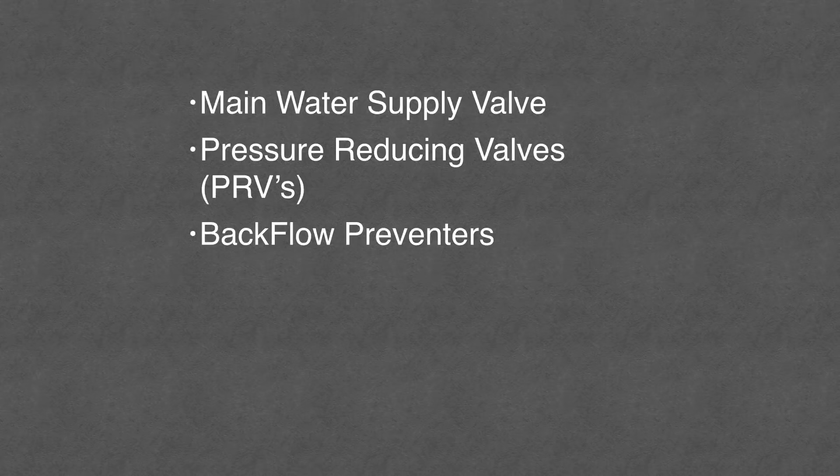Pressure reducing valves, which are required equipment if you have excessive incoming water pressures. We don't have too many of them here on the East Coast, but on the West Coast and other parts of the country, they are a required item. Backflow preventers, another item that is required in certain situations, and we'll cover that. Pipe supports, meaning how your pipe is supported, how it's hung from the ceiling, how it's connected to the wall.

Cleanouts, meaning access to your sewer when it needs to be cleaned out. You'll want to find out sooner than later that those cleanouts come off in a time of need. And finally, sump pumps. For those of you who have the privilege of groundwater coming into your homes, you know what sump pumps are all about, and we'll go over some tips I hope to share with you in the following slides. So sit back, relax, and let's get started.

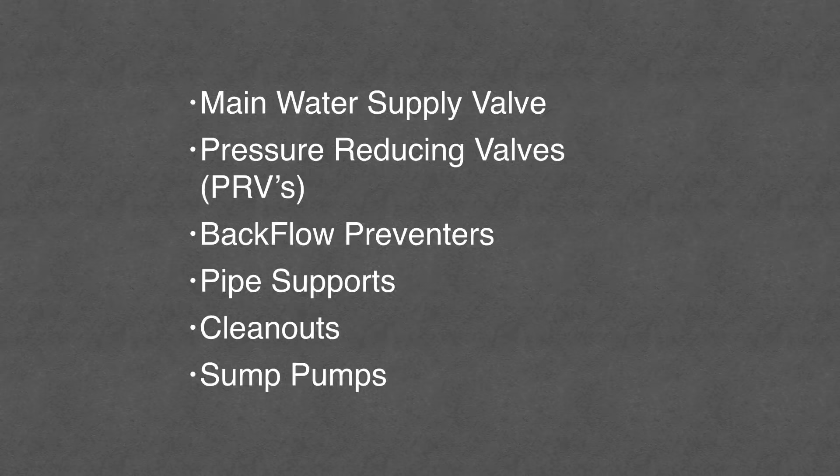The main water supply valve. Do you know where yours is located? It could be in a basement, underground, located in a pit, or even located in a curb box outside of your home. Regardless of where it's located, it should be tagged and documented so everyone in the family knows exactly where it is should an emergency take place.

Where to look? You can look at the front-facing wall of the building, either at ground level or possibly in a basement. You can look below ground, possibly in a pit located with the water meter or the sewer cleanout covers. Look outside of your home for a recessed curb box.

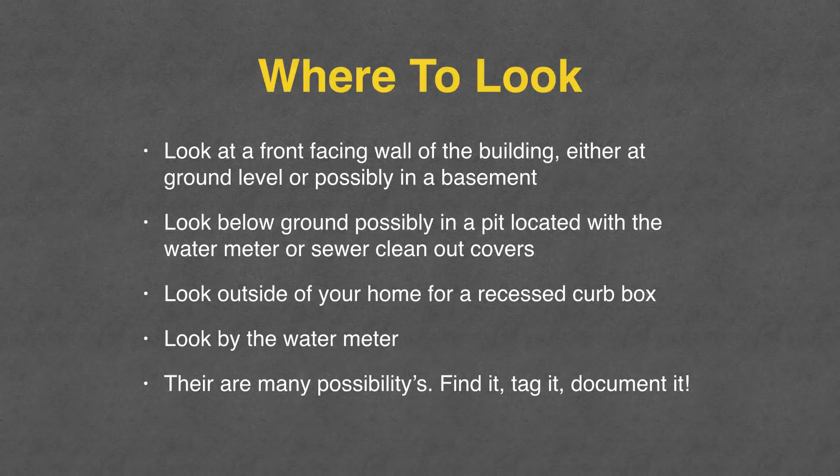I know in parts of the country they are located outside. You can look by a water meter. There are many possibilities here, folks. Find it, tag it, document it so everyone knows where it is.

Why you should care? Because individual point of use valves found under most plumbing fixtures often do not shut 100%. As a matter of fact, folks, 99% of them don't hold. It's just the way it is. They're just under there. They've just been there for years and years and years. Nobody's ever bothered to try them out.

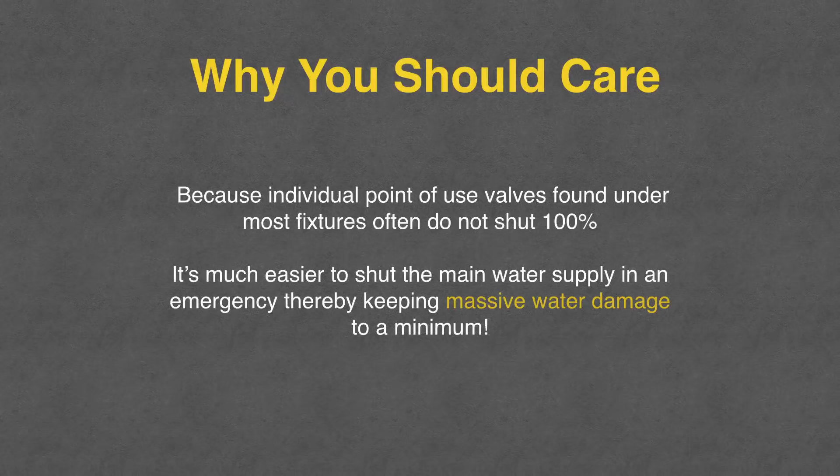And when the day comes that you want them to work, they never work. It's much easier to shut the main water supply in an emergency, thereby keeping massive water damage to a minimum. Let's check it out in our first technical timeout.

All right, folks, this is real plumbing. As you can see, we have a copper water main coming in the front wall of this building. It's about 3 feet above the basement floor here. And as you can see, we have the gate valve, which is the first valve off the line, and that's a round handle gate valve.

And as I said, with round handles, you close to the right, open to the left. Or if you can't remember that, it's righty-tighty, lefty-loosey. And that continues on here into the meter set. And we have our water meter here.

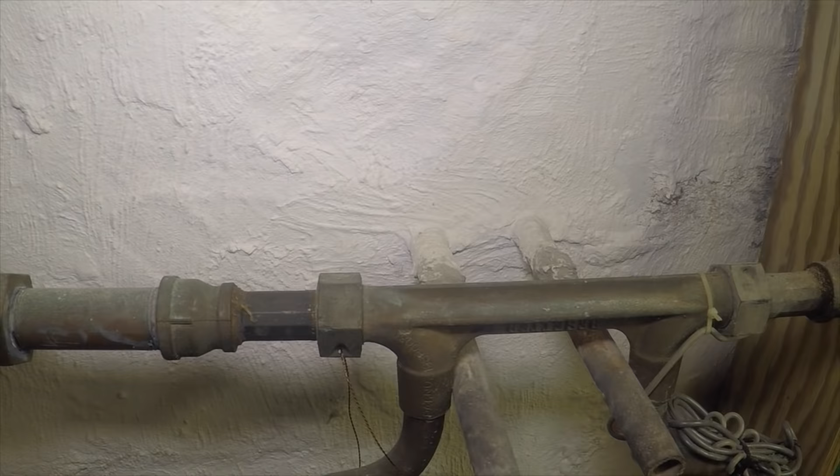And actually at the bottom of the water meter, you're going to see there is a ball valve here. The handle's facing the back. And here's another ball valve here. These are quarter turn to the right or left, depending upon which way this meter set is put in. And in this case, they came out of the meter set.

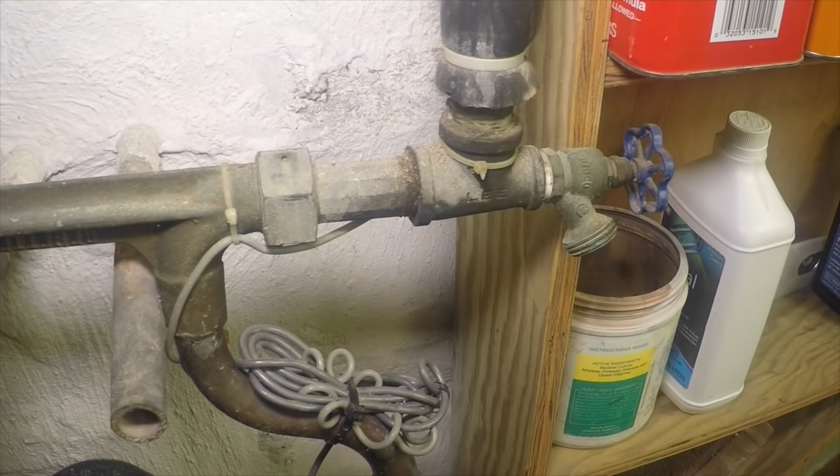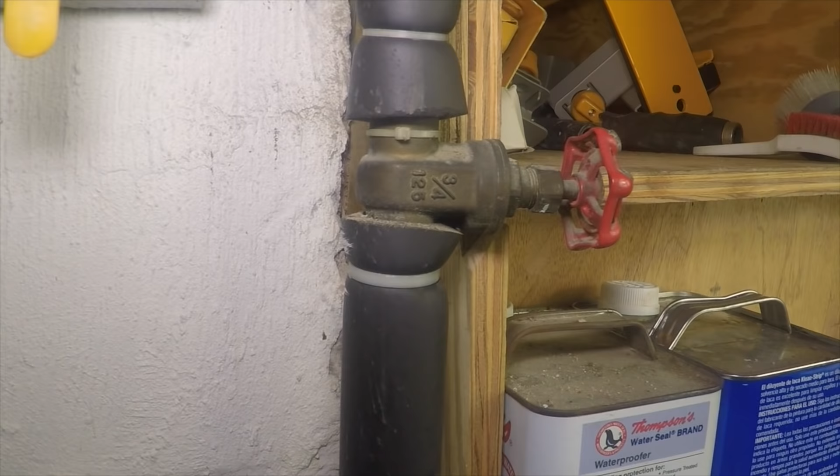The meter set comes up, continues on. You're going to see there's a hose bib. And this continues on up and distributes throughout the house. And in this case here, they actually put another gate valve in here. I don't know why they did that, but they did. It's not a problem. But this is surely an example of a water main coming in.

And as this is the case that we're looking at here, I don't see any tags. But that's because I'm familiar with this building and I'm pretty much the only one here who would ever have access to this room. So I know that's the water meter, but you're going to want to tag your valves. You can tag them, identify them, and that's the main water shutoff.

In a pinch, if there's a problem, if I have water leaking anywhere within this building and I can't be bothered going chasing after individual shutoff valves, this is the go-to valve that I'm going to shut, and then I will assess the situation. So there you go. This is one situation where the water main is coming in. You can see it coming in the wall there.

And it's not always the case. Sometimes it comes in below grade. Sometimes it comes in through the floor and up. But in this case, this is pretty much a typical situation that you would see in a building such as we're looking at.

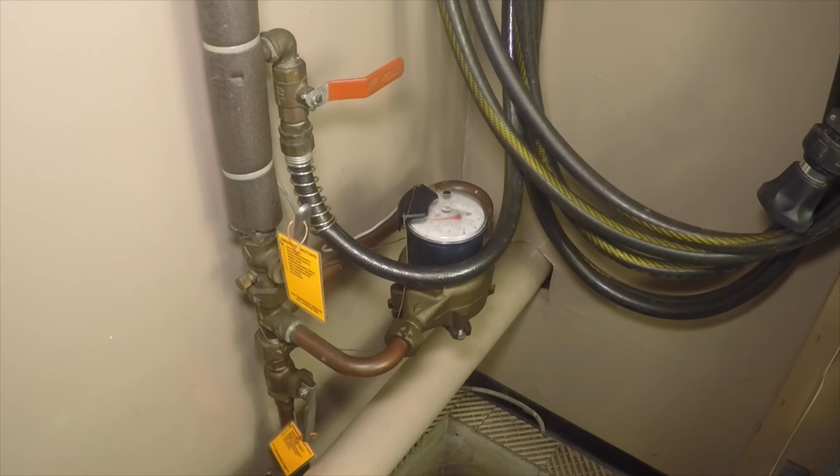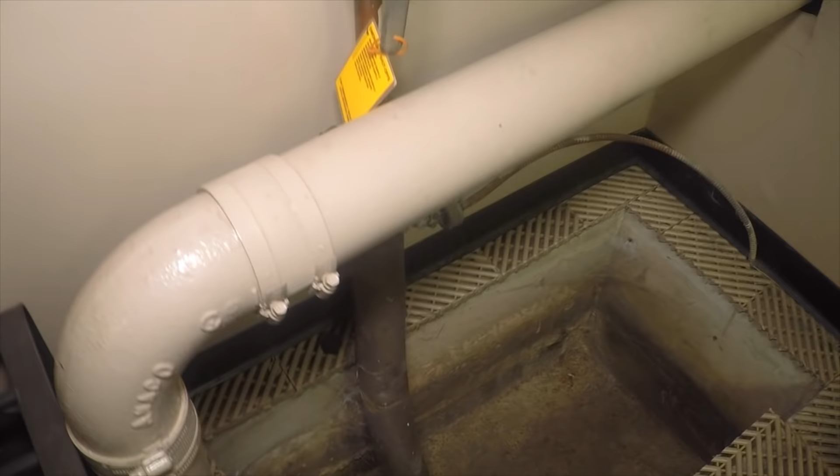Okay, folks, here we are, just another example of a main water supply coming in. And in this case, we're in a garage. And this water main is actually coming up out of the pit. And you see the water meter there. And let me just take a shot down the pit. And as you can see, we go down, comes up out of the pit.

And what do we see in there alongside the water main? You can actually see the two covers, the cleanout covers for this house sewer system. So on the right there, you're going to see the cleanout that goes out toward the street. In this case, this home is equipped with a septic tank. And on the left is the one which would go toward the house, the building house drain.

So just another example of where you might find a water main coming in. Again, this pit is below grade. It's about 12 inches below grade. Comes up out of the pit.

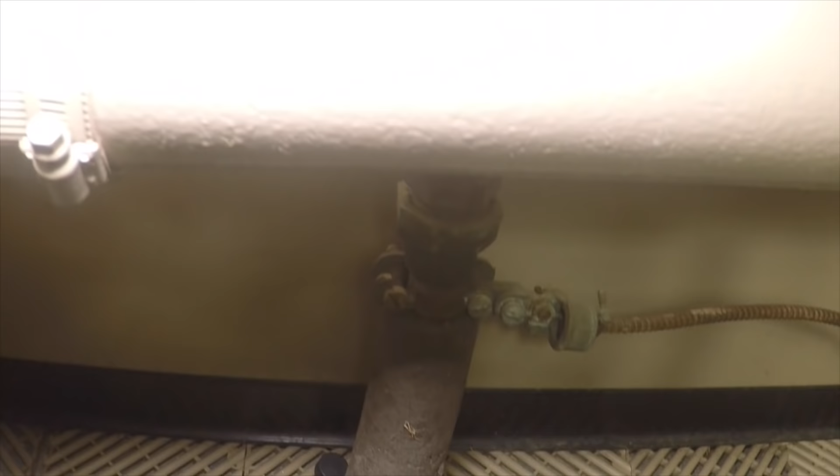And as we come up here, you're going to see this pipe here that we're going to be looking at in a second is the fresh air pipe to the sewer system. And that goes out the front wall there. And actually here you can see it coming up out of the ground just ahead of the house cleanout cap.

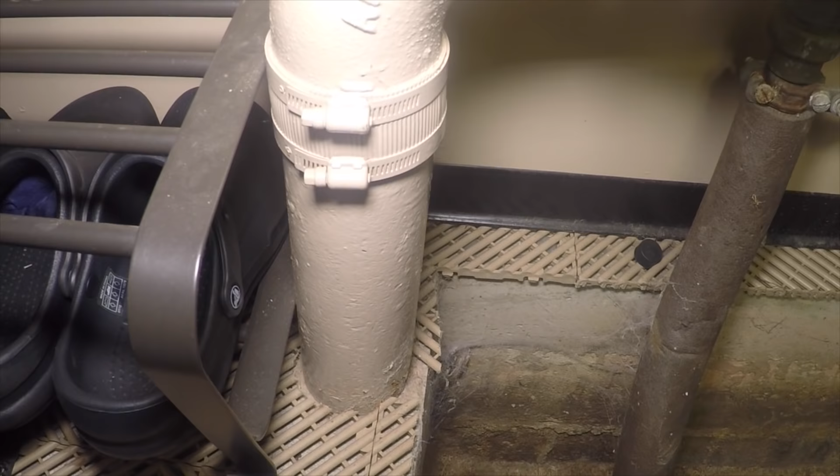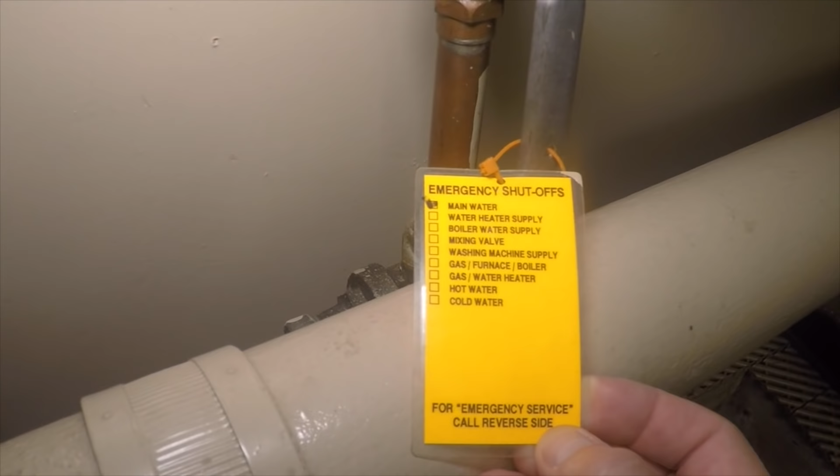And I wanted to bring to your attention here, in this case, these valves are actually tagged. Now this is the meter set. The meter set has these quarter turn ball valves on them. And in this case here, we have some tags noting what these valves are for, which is pretty handy because if there's an emergency happening and the homeowner doesn't know what to do, they can certainly come over here and take a look at these tags.

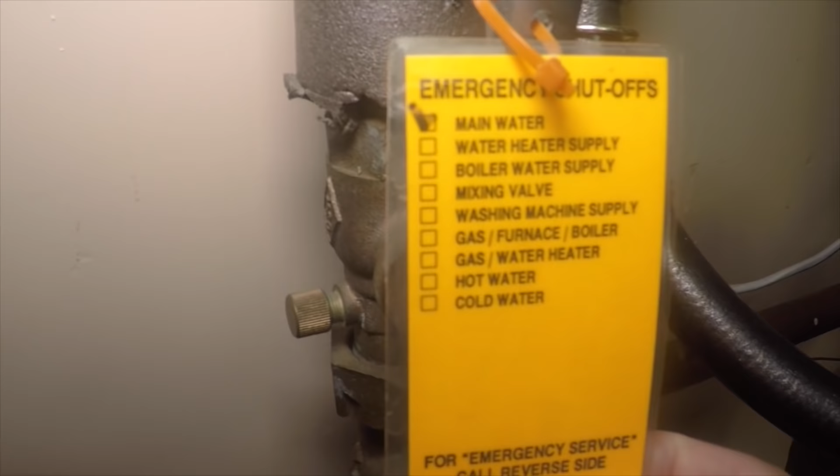So we got a valve on the inlet to the meter set. We also have a valve on the outlet to the meter set, and they are clearly tagged what they are, what their function is.

And let me just scoot in behind here because we couldn't see this behind the fresh air inlet, but the first valve on the main here, and actually they took the handle off, but this is a gate valve. This is the original gate valve that was installed on the water main, and the handle was taken off. I don't know what the reason may have been, but I can certainly tell you it's much easier to do a shut off with these quarter turn ball valves. Either a quarter turn to the right or a quarter turn to the left. And there you have it.

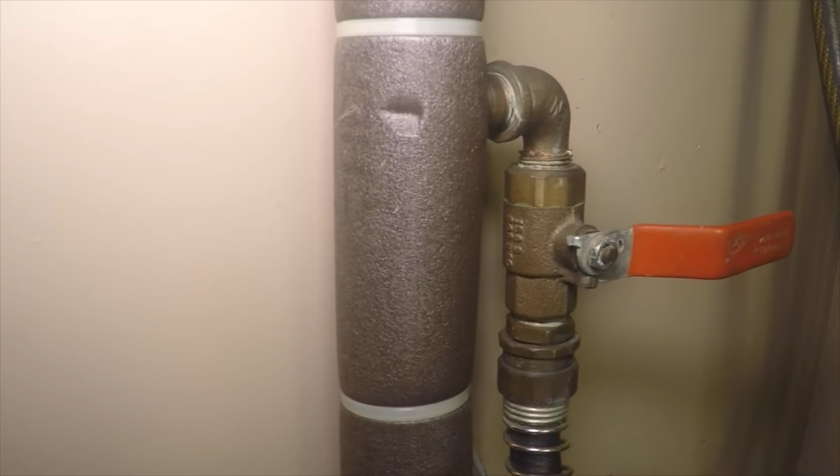As we come up here, there is the outlet to the meter set with another quarter turn ball valve. And actually, we have a ball valve that's servicing the garden hose. So this is just another example of where you guys might be looking or trying to locate your water main. They're in all areas. They're in basements. They're at ground level. They're below grade. They're outside. So just some more food for thought in case you're trying to figure out where your water main is. And a nice touch would be to have your valves tagged.

I highly recommend it because when that emergency happens, you want to know exactly what to shut. By knowing exactly where to shut your main water supply off in a time of need will save you from the expense, heartache, and inconvenience of massive water damage.

Let's review. We looked at the possible locations of the main water shutoff valve. If it's a round-handled gate-style valve, I suggest that you turn it off to the right. Everything always turns off to the right. And if you have a problem remembering that, I would suggest you remember this: righty-tighty, lefty-loosey. Always go clockwise for a round-handled valve. Now, if you have a lever style or a ball type valve, the off position is generally a quarter turn to the right or left, depending upon the valve orientation.

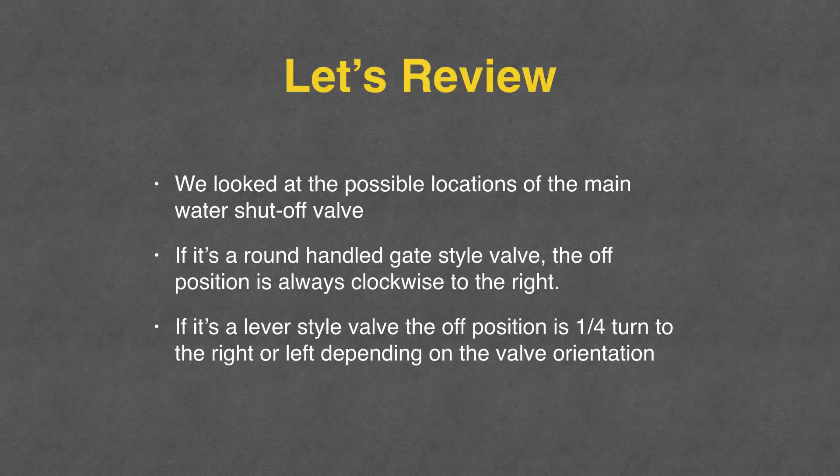Pressure reducing valves, also known as PRVs. Pressure reducing valves are designed to reduce excessive incoming water pressures to safe working levels. In New York City, incoming pressures can range anywhere from 40 psi to 80 psi. But in California and other parts of the country, the incoming water pressures are in excess of 100 psi, which can cause damage to the entire plumbing system.

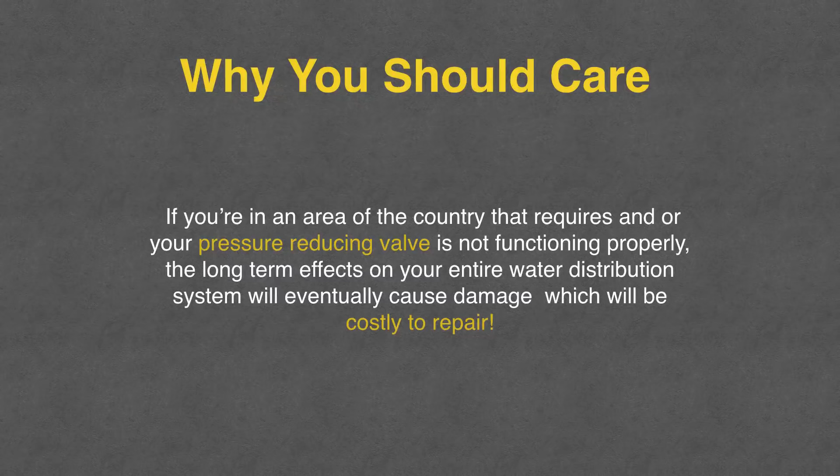Why you should care? Well, if you're in an area of the country that requires one, or your pressure reducing valve is not functioning properly, the long-term effects on your entire water distribution system will eventually cause damage, which will be costly to repair. Where to look? If your main water supply valve is equipped with a pressure reducing valve, it should be directly ahead of your main shutoff valve. Let's check it out in this technical timeout.

Okay, pressure reducing valves. I'm located in the New York City area, and our incoming water pressures here run somewhere between 40 psi and 80 psi. So as a result, we're not required to have PRVs put on our incoming water services. But if you're in California or other parts of the country where you have pressures in excess of 100 psi, you're going to be required to have them put on, and you can check with your local building department. Now, if you wanted to test your water pressure, you most certainly can.

You can get a pressure gauge and connect it to a hose bib where you connect your garden hose to and take a pressure reading. And just a little tip here, folks, if you take pressure readings during different parts of the day, meaning the morning, afternoon, at night, they're going to vary. They're going to be down in the morning. They'll probably be somewhere in the middle in the afternoon. And at night, they're going to be way up because people are sleeping.

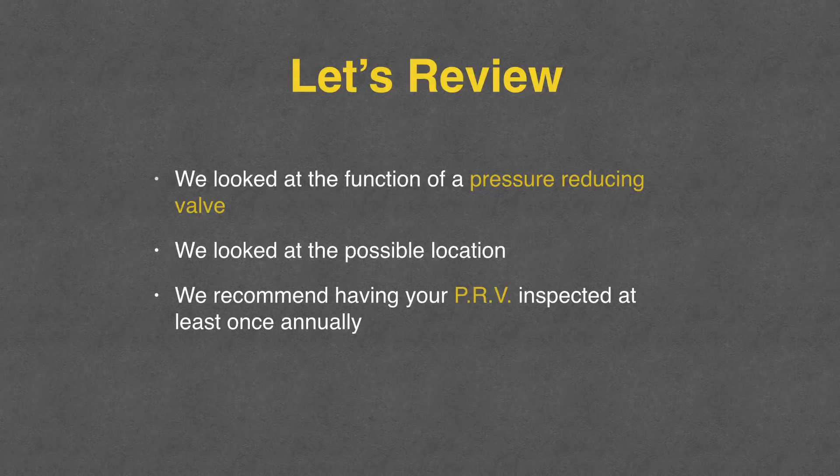Let's review. We looked at the function of the pressure reducing valve. We looked at the possible location. And I recommend having your P.R.V. inspected at least once annually by a licensed plumber.

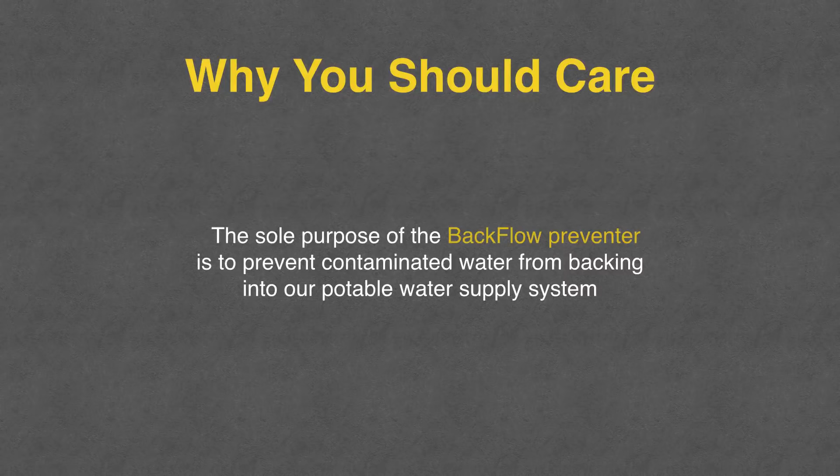Backflow preventers. Backflow prevention is a mandatory requirement across many applications in the plumbing trades. In the residential setting, they can be found on water supply piping to steam boilers, hot water boilers, and outside hose bibs. Why you should care: the sole purpose of a backflow preventer is to prevent contaminated water from backing into our potable water supply.

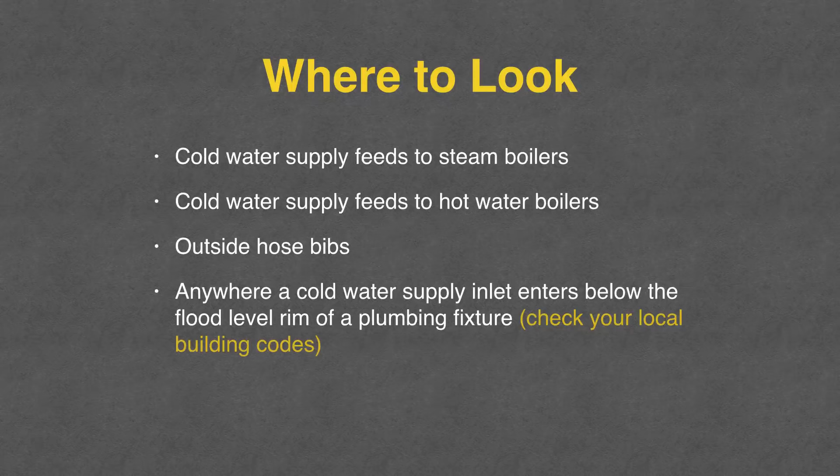Where to look? You can look for them on cold water supply feeds to steam boilers, cold water supply feeds to hot water boilers, outside hose bibs. You should have them on an outside hose bib because Lord knows that we let the garden hose sit in puddles of dirty contaminated water, and all that can be sucked back into the drinking water, folks. Anywhere a cold water supply inlet enters below the flood level rim of a plumbing fixture, check with your local building codes. Let's check it out in this video.

Now the vent is the dump port. And what will happen is if there is a momentary drop in pressure on the inlet side, that'll create a vacuum pulling water out of the boiler. And the idea of a backflow preventer is to dump that water out rather than siphon it back into the drinking water. So you want to make sure these things are in good operational order.

As a rule, if you see them piddle or release a little water every once in a while, they're doing their job. But if you notice a continuous dumping of water from the vent port, that's going to tell you that that valve is in need of some service or possibly some replacement. So that's it.

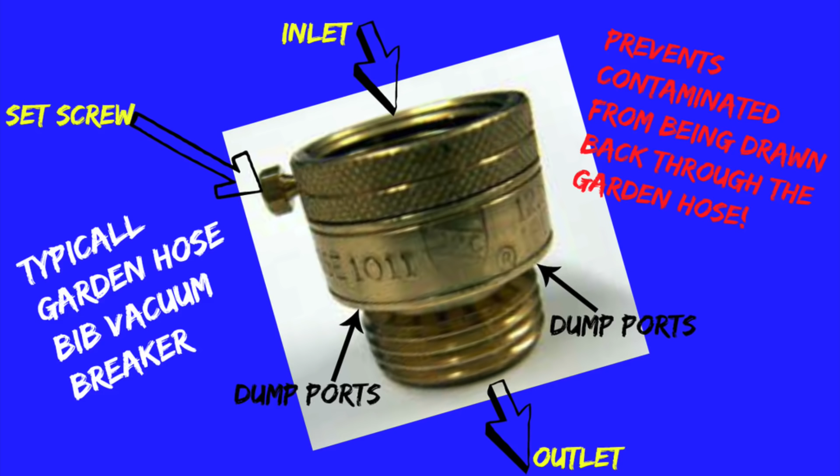Backflow preventers have an inlet, an outlet, and a dump port. If conditions warrant, water will leak from the dump port until the danger of a backflow has ceased. When the danger has passed, the water will stop flowing. If a backflow preventer leaks continually, it's an indication of repair and/or replacement.

Let's review. It's extremely important for backflow preventers to function properly. They protect your family and the surrounding community from cross-contamination of the potable water supply. Backflow preventers should be inspected at least once annually by a licensed professional.

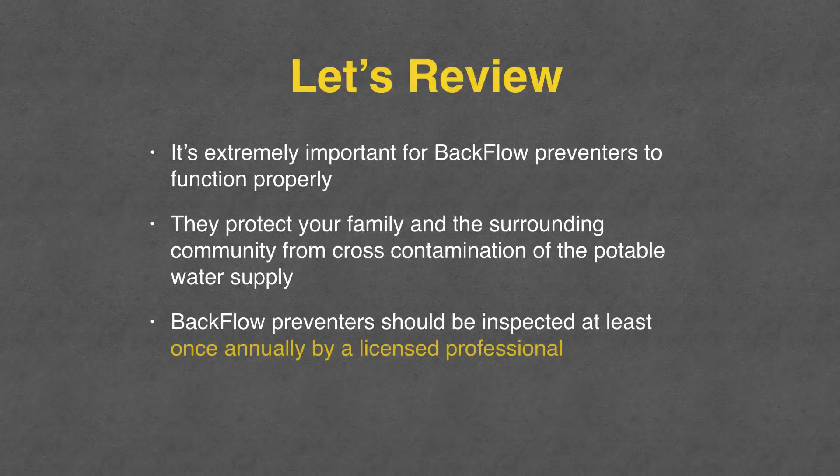Pipe supports. An often overlooked item that I don't find too many faults with are pipe supports. Depending upon its function, a suspended pipe should be perfectly level or slightly pitched. But in either case, there should be no signs of sagging. Different diameter pipes require supports at different intervals. If your pipes are sagging, give them a little extra support. They'll absolutely appreciate you for it.

Why you should care. For those of you who live in the eastern part of the country and own steam heating systems, a sagging steam main can trap pockets of water, causing loud banging and eventually causing the pipe to corrode. By providing extra supports at the recommended intervals, you'll allow the water to return to its source, thereby eliminating long-term damage to your pipes. In addition to your steam heating pipes, all drain lines are required to be pitched, allowing water to properly drain away.

Where to look? By simply giving a visual inspection of all exposed and hanging pipes, you'll be able to identify where support is needed. Below, I provided you with a source that you can use when hanging pipe should you decide to do it yourself. As always, you should check with your local buildings department to comply with the local requirements.

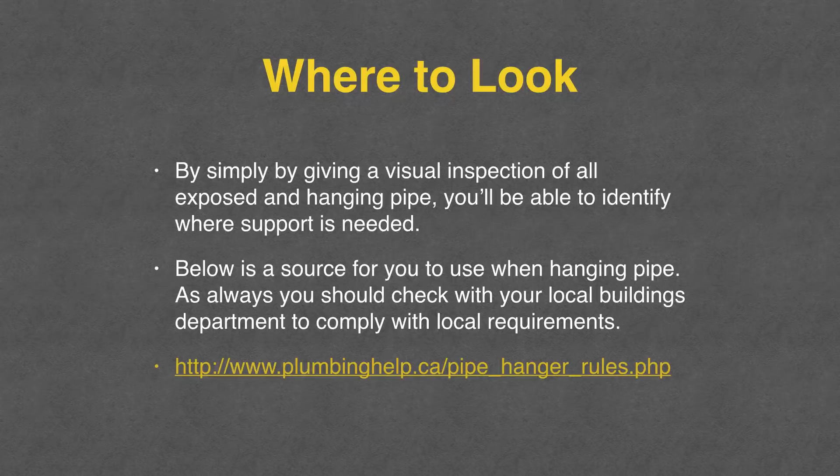It's very important to have the pipes secured correctly because water flows through them, water moves. There is this thing called thrust, and water pipes can shake and they can move around. And if they're not properly supported, at some point I've seen water lines or waste lines actually fall down. So the moral to this story pretty much is you have to support your piping. And I look for this when I'm doing my inspection.

Now, there are specific rules when it comes to supporting pipe in terms of what the diameter of the pipe is, what the material of the pipe is, and at what intervals the hanger should be installed. And pretty much, if I'm doing a job and I'm having an inspection, the inspector is looking for hangers and he's looking to see if there are the proper number of supports. And if there aren't, he'll fail the inspection, plain and simple. So if it says I need X amount of supports within a certain area and I'm missing one, he's going to fail me.

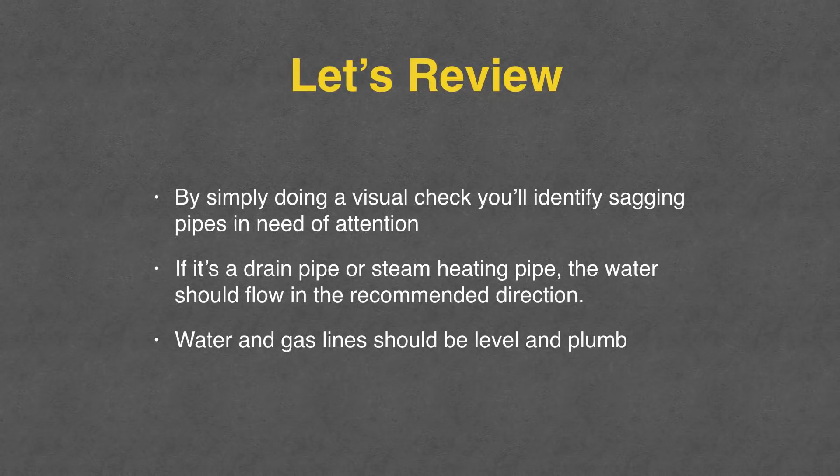Cleanouts. When talking about cleanouts, I'm referring to access points in the main sewer where a mechanical snake can be introduced for the sole purpose of cleaning. Why you should care: you don't want to find out when your sewer is backing up that you either can't find or can't remove a cleanout cover when the sewage is backing into your home. Folks, it's not a pretty sight. I've been in basements when the water was coming out of the toilet bowl at the basement level. We couldn't get the caps off in time, and need I tell you what the result was? Nasty, nasty.

Where to look. This may vary in different parts of the country. It could be in a basement or at street level located in a pit below grade. It could be located in your garden outside of your home. It could also be located in a curb box outside of your home. Let's take a look in this video.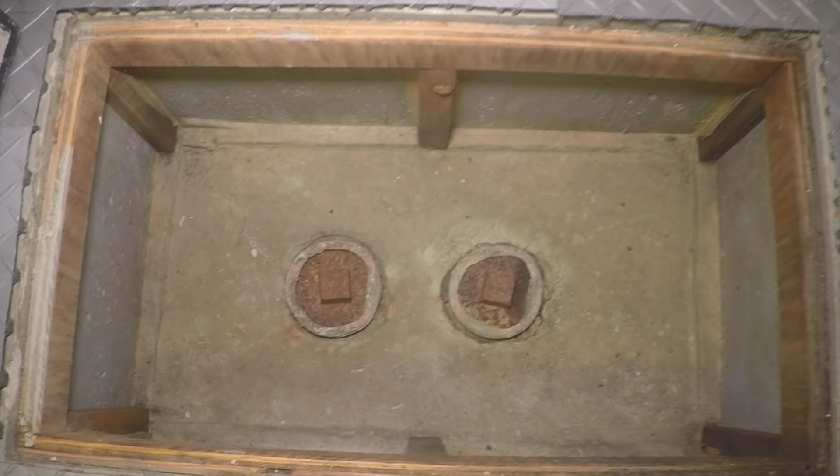Now what you're looking at here are cleanouts. This is the building house trap. If you could actually see down in there, it's a U-turn below ground. The right side there is the access to the street side, in case you had to clean the street sewer going out to the street. The left side is access to the house side, the building house drain.

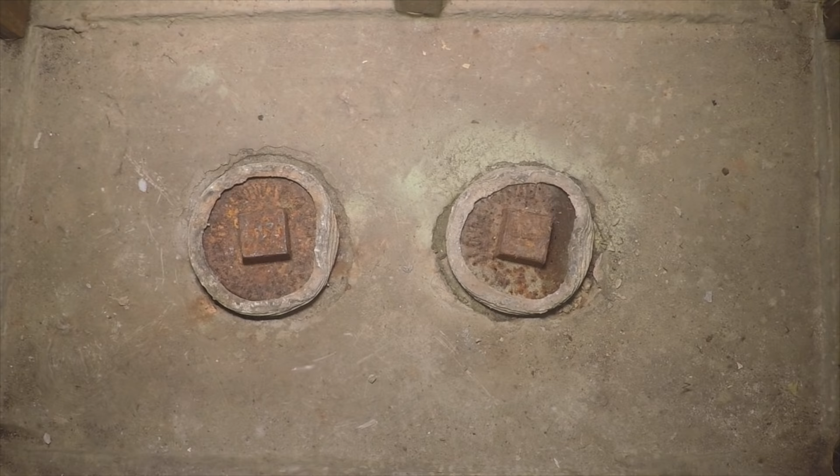These are lead fiddle covers. They replace the original brass screw covers that were on there. You simply hit them on either side of those hex and they pop off. And if you have to get them on in a hurry, you just slap them on and hit them with a hammer, and they go on very easily.

Now what I'll do is we'll go in the back of the building here. Now in New York, it's required to have a clean out every 50 feet, but a lot of buildings are very shallow. You don't get many buildings that are 50 feet long from front to back. But what you will find are clean out accesses to the floor drains and the roof drains. So there is one in the back of this building, and I'll show you that.

And what I wanted to point out here is that you will also find in New York here, water mains will be coming in. I've seen situations where the water mains, instead of coming out of the wall, will come out here, and you'll have the valve located in the pit, and they will even manage, believe it or not, to put the meter in here. I've seen situations where the sewer covers will be below the water meter, but they will come in below grade. It all depends on the building. It all depends on the block you're on and how they ran the utilities at the time.

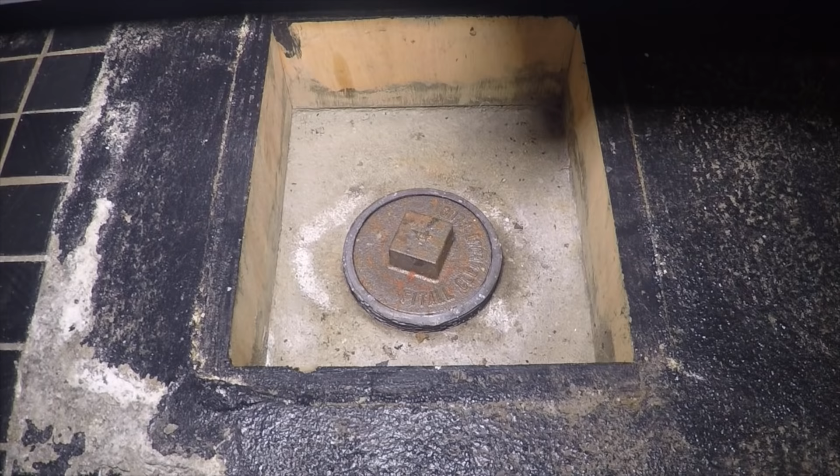So let's shoot to the back of the building here, and I'll show you that other clean out that is accessing the rear drain and the roof drains. All right, and here we are at the rear of the building. Here is another clean out. We're about 35 to 40 feet away from the main house trap we were just looking at. So to the right here is toward the front of the building, and to the left is the rear of the building, and this clean out services the rear yard drains and the roof drains of this building.

So there was a brass cover on here at one time. I'd taken it off, and I put this new lead fiddle plug on here, which is very easy to get off, very easy to get on. Trust me, guys, you don't want to find in a time of need that you can't get this cover off, especially if you got sewage backing up.

So my word of caution, if you have a plug that won't come off, I highly suggest calling your plumber in and either replace it with a new brass cover, keep it well lubricated so it does come off, or, my choice here, the good old lead fiddle plugs. They work all the time. And yeah, that's my take on cleanouts.

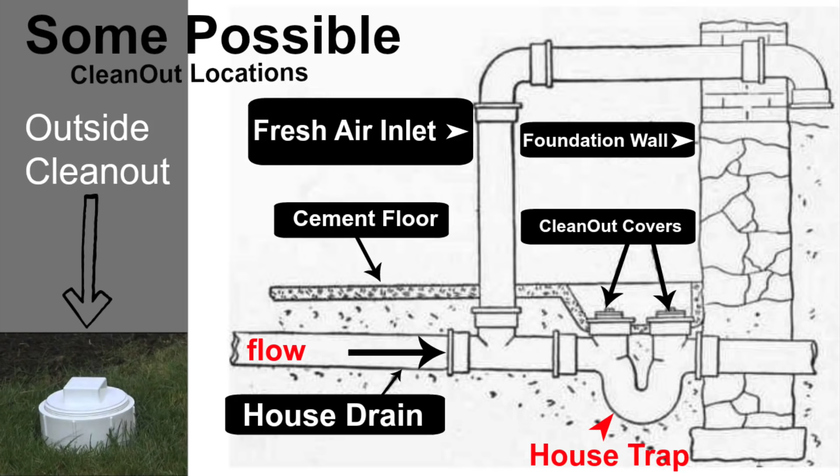And I would tell you that you should locate your cleanouts. And if they haven't been out, get a pro in to take them out, put some new covers in, lubricate them so you know that when you need to get them off, they'll come off. And that's about it for some possible locations of your cleanout covers.

If you know where your cleanouts are located, try removing them. If they don't move or refuse to come off, call in a pro to install new ones. Make sure they lubricate them well with waterproof silicone grease to ensure they'll come off when you need them to. You don't want to find out in your time of need that the cleanouts are frozen in place.

Let's review. We talked about the importance of locating your cleanouts and making sure they're fully functional. Like the main water supply shutoff valve to your home, they should be documented so the entire family is aware should an emergency take place.

Sump pumps. Sump pumps are used in many residential applications to remove or divert unwanted groundwater. The most popular use of sump pumps is in the installation of a French drainage system. Now, a French drainage system is simply a perforated 3-inch or 4-inch plastic pipe that is buried below grade, backfilled with drainage stone, and then is piped to a sump pit where the sump pump can divert the water away from your home.

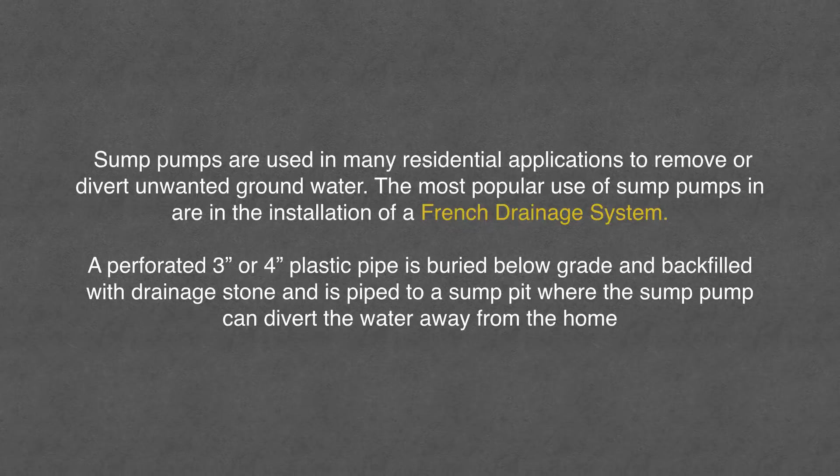If you have a French drainage system in your home to remove excess groundwater, you'll want to periodically test the sump pump by introducing water into the sump pit and ensure the pump is working. You don't want to discover the pump gave up the ghost when the pit starts to suddenly fill with water.

I'm going to give you a tip here, folks. I keep a brand new sump pump piped and ready to go in the event of a pump failure. To date, I'm actually working on my third pump. I got my third pump on deck, ready to go. God forbid my existing pump gives up the ghost in a time of need.

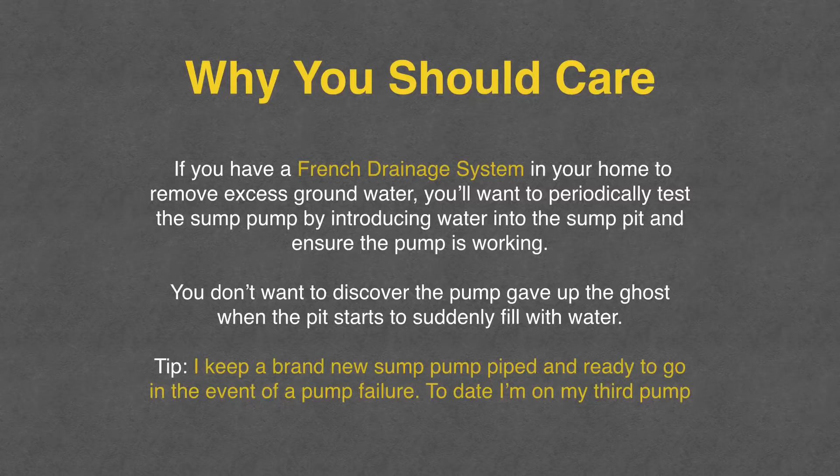Where to look? You'll find them below grade, covered or uncovered, in one or more of the following. You'll see them in basements. You'll see them in garages. And as is my case, it's located under my stairwell. I have a high ranch, that is, I'm on slab. I have a second floor and then I'm on slab, and underneath the stairwell, I actually have a 5-gallon bucket sunk into the ground where the sump pump is located.

I have French drainage pipe coming in from the left and right side. And boy, let me tell you, since it was installed, I have been one dry puppy. Been very happy with my sump pump. But I test it. I make sure it's working periodically.

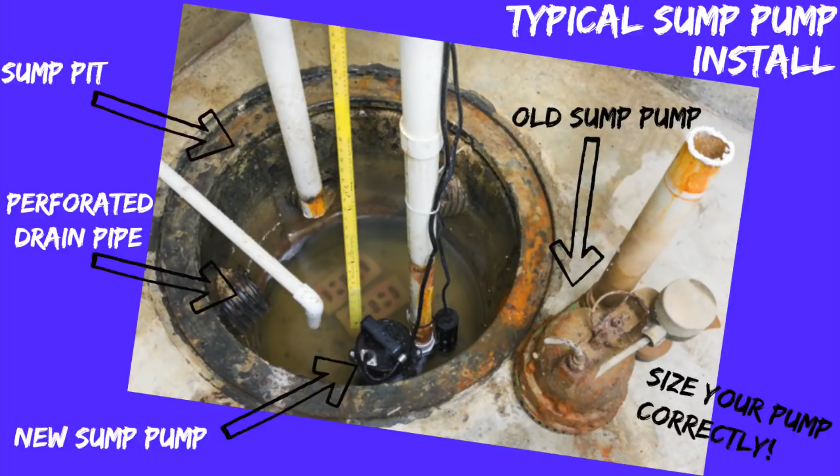Let's check it out in this technical timeout. So here we go, folks. This is a typical sump pump installation. This looks like a commercially available sump pit. It's a rather large one. Actually, there's 2 pumps in here. They got the old one up on the deck and they have a new one there on the left side, but it looks like they have space for another pump.

Actually, the pumps are propped up on bricks, which is a great idea because you don't want the sediment to build up and start sucking up sediment. But basically, you'll see that perforated drain pipe coming in the pit there. And I see a couple more areas. There are 2 more areas where I see that perforated pipe dumping into the pit.

And basically what happens is when the water table gets high, or when it's raining, or whatever the situation may be, that water starts pouring into this pit, that pit fills up, gets to a certain level, the pump comes on and diverts that water out. Now, the important thing here is to size your pump correctly, meaning you want to get the right pump that can pump up high enough and pump the distance that you need to get the water away.

In my own home, we utilized a regular 5-gallon bucket, drilled it full of holes, set that in the drainage stone, and I got my pump set down inside of there, and it works like a charm. I'm currently working on my third pump. I always have a new pump on deck ready to go because you can never tell when these things are going to fail. And I don't want to be in a situation where my pit is filling up and I don't have a pump ready to go. So I just go out and buy a new one and have it sitting there ready to go.

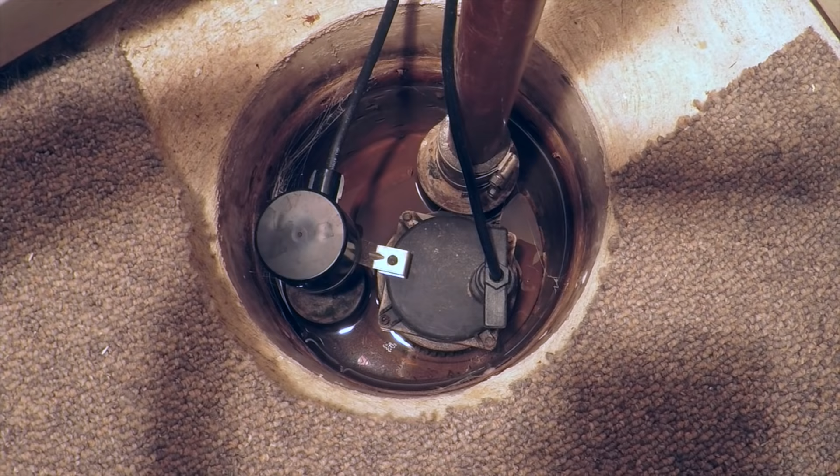So there you have it, folks. This is the actual sump pump in my own house. And as you can see, they used a 5-gallon bucket. And I got to tell you, it's not fancy. They drilled holes in it. The pump sits down there inside of the bucket. And when that bucket starts to fill up, the pump works like a charm. Now, unlike the one we saw in the illustration, this is a smaller vessel to hold the pump in, but regardless, it works like a charm.

And back in the day, before this was put in, we used to get water coming in the house continually. And ever since the day that this was put in, I haven't had a drop of water in my house. So, if you have a sump pump, you're going to want to make sure every once in a while you throw some water down there and make sure the pump comes on. And basically, that's it, folks. So I just wanted to give you this little tidbit.

And again, this is the sump pump in my very own home, and it's underneath the staircase. And I got drain pipe coming in from both the right and the left sides. And when it rains heavily, or even sometimes when my sprinklers are on, the pump will come on because the pit starts to fill up. So there you go, folks. If you have a sump pump, you want to make sure you occasionally test it to make sure it comes on when it's supposed to, because you don't want to be in a position that the pit is filling up and the pump is not pumping.

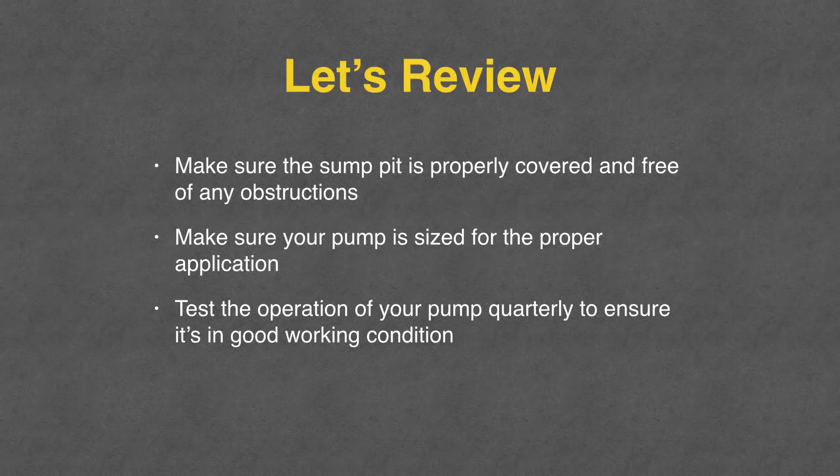Let's review. Make sure the sump pit is properly covered and free of any obstructions. Make sure your pump is sized for the proper application. And test the operation of your pump quarterly to ensure it's in good working condition. So there you go, guys, the water and drain module.